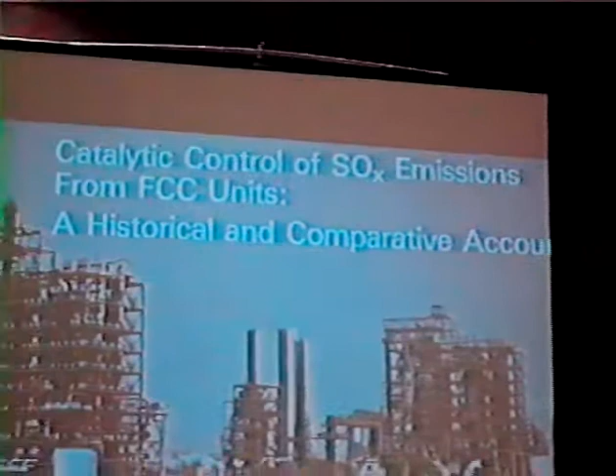This morning I'd like to discuss with you the development of catalyst systems for the control of sulfur dioxide emissions from FCC, fluid catalytic cracking units. I'd like to trace their chronological development, because I believe the chronological development of the sulfur dioxide system at Amoco pretty well parallels what's been done by other workers in the field. We'll look at the composition, variables, and activation of these SOx control catalysts, and also some catalytic systems now being pursued commercially to control SOx emissions from FCC units.

The driving force in this research is the 1987 EPA regulations, which will limit SOx emissions to less than 300 parts per million. If you're curious about the background of this particular slide, these are two of Amoco's fluid catalytic cracking units.

It's almost 10 years to the day since Vasalos and his co-workers at Amoco announced the development of the UltraCat system for handling SOx control from fluid catalytic cracking units. They did this in a paper reported at the 1977 API meeting in Chicago. Shortly after that, a number of companies announced that they too had developed catalysts for handling sulfur dioxide emissions. These are the dates of the announcements found in the trade literature. Amoco and others have been working in this area for well over 15 years.

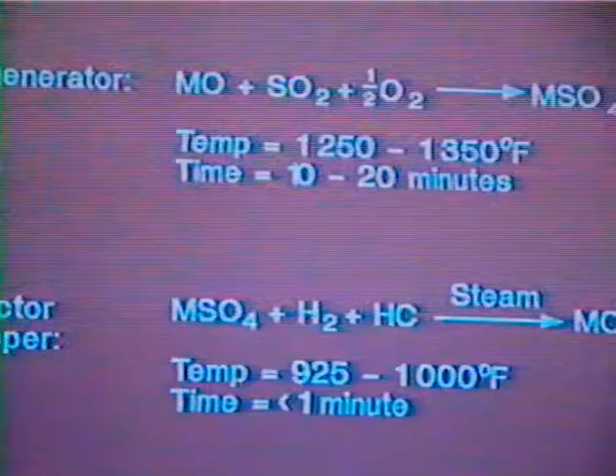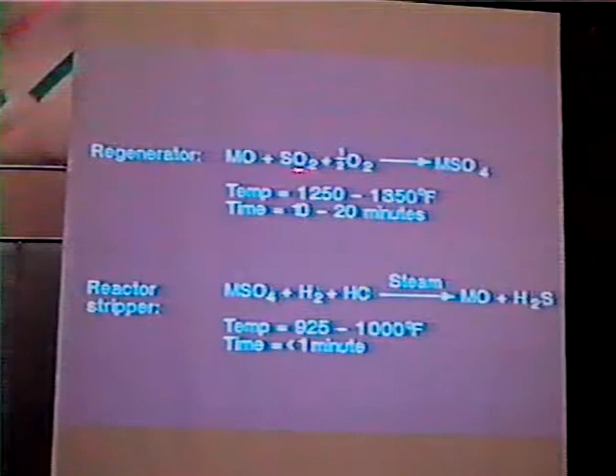This is an oversimplification of the chemistry involved in the process. In the regenerator, catalyst is added, depicted here as metal oxide, which could be cracking catalyst. It reacts with the sulfur dioxide and sulfur trioxide formed when sulfur in the coke is burned in excess oxygen to form the metal sulfate. The temperatures here vary between 1250 and 1350 degrees Fahrenheit, and the times vary between 10 and 20 minutes.

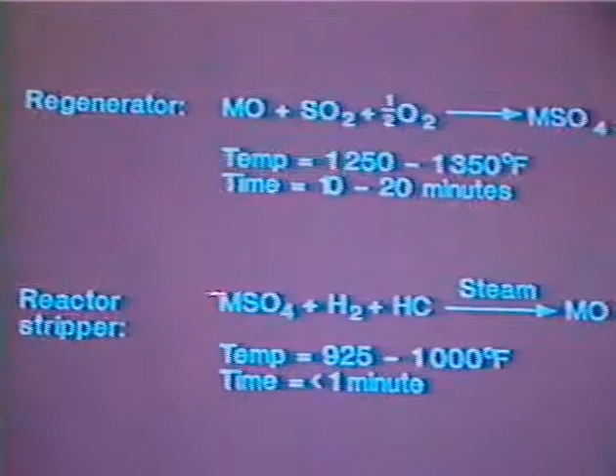The catalyst then moves from the regenerator to the reactor stripper section, where it reacts with and is reduced by hydrogen and hydrocarbon during the cracking reaction. In the presence of steam in the stripping operation, the sulfur is converted to hydrogen sulfide. The catalyst is then regenerated and ready for another cycle. During the cracking operation, temperatures vary between 925 and 1,000 degrees Fahrenheit, and the catalyst is in the reactor for less than 1 minute.

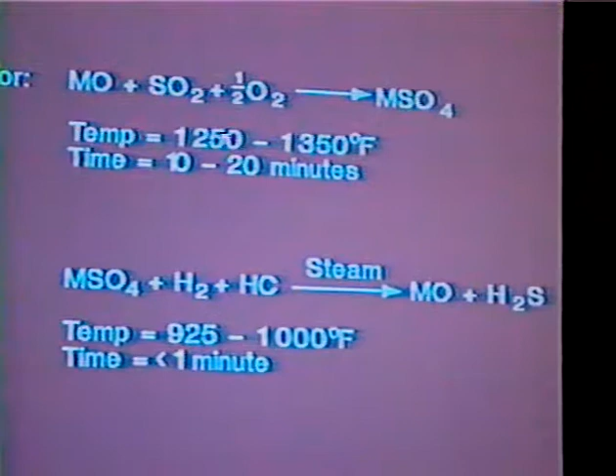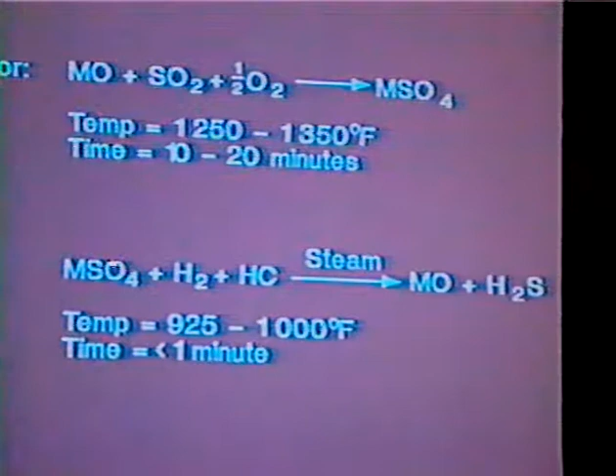I'd like to point out that under these conditions, particularly the severe conditions in the regenerator, the cracking catalyst and the SOx transfer catalyst must be rugged to withstand them. Also, any catalyst put into the system for SOx transfer control must not have an adverse reaction with any of the reactions taking place during the cracking reaction itself.

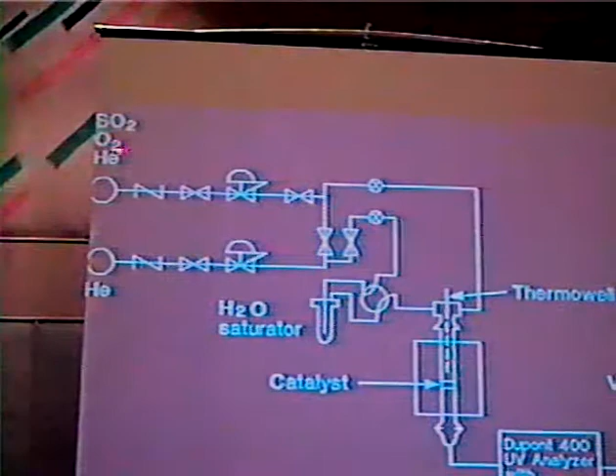This is a diagram showing our experimental equipment. We blend sulfur dioxide and oxygen, mix it with helium saturated with water at room temperature to give a composition of 1,000 parts per million sulfur dioxide, 2.7% oxygen, and about 2% water. The gas mixture is passed over the catalyst. About 1 gram of catalyst is used in the system. The reactor is quartz, provided with an axial thermowell. The gases then exit and are analyzed as they pass through a DuPont UV analyzer.

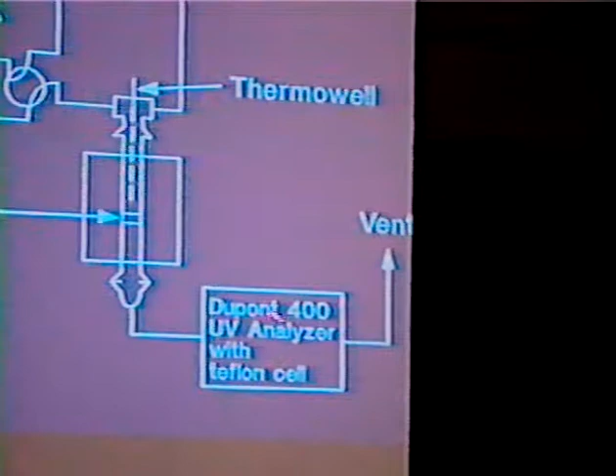We've used this apparatus for all our screening work, as well as for following the deactivation of SOx transfer catalyst during commercial trials. We'll report our data as the percent of sulfur dioxide removed, or as the amount removed over some time frame. All of our catalysts are pre-treated in steam at temperatures between 1250 and 1550 degrees Fahrenheit.

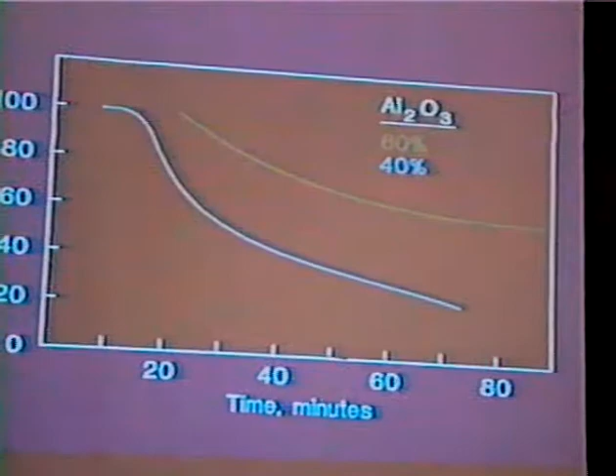Let's move on to cracking catalysts, where this all began. This is a plot of the percent of sulfur removed versus time for three different cracking catalysts of varying alumina content, varying between 30, 40, and 60%. The amount of sulfur dioxide removed depends upon the amount of alumina in the cracking catalyst. A higher alumina removes more sulfur dioxide than either the 40% or the 30%.

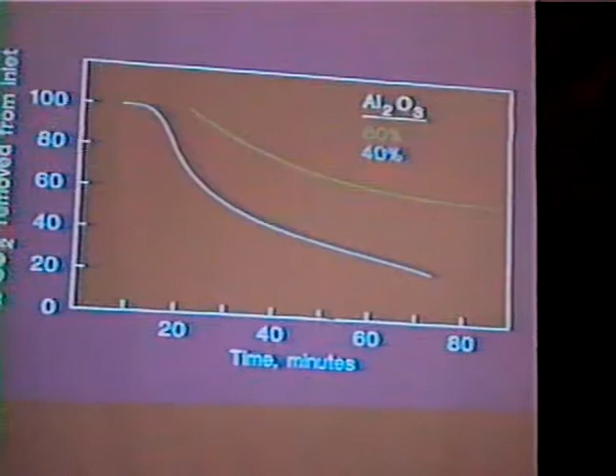This green line actually represents two catalysts: one made with rare earth exchange Y, and one that contained the Y in the hydrogen form. This was slightly misleading to us at first, because we thought, based on this data, that the rare earth had no influence on the sulfur dioxide absorption.

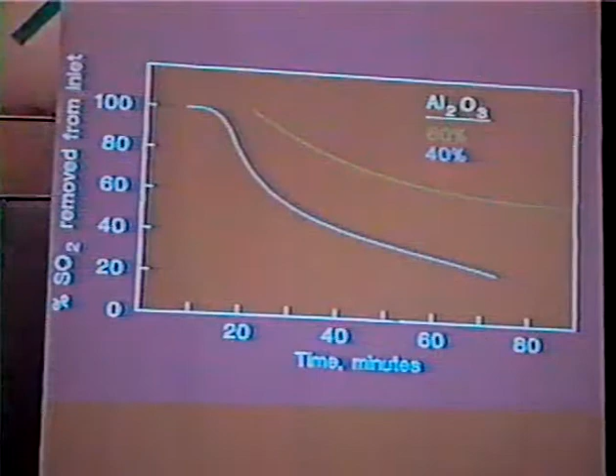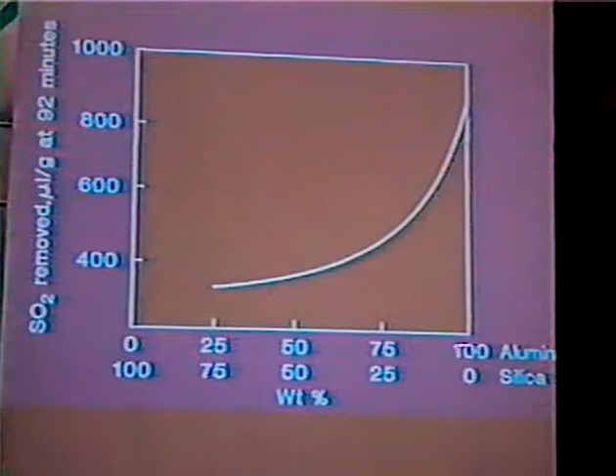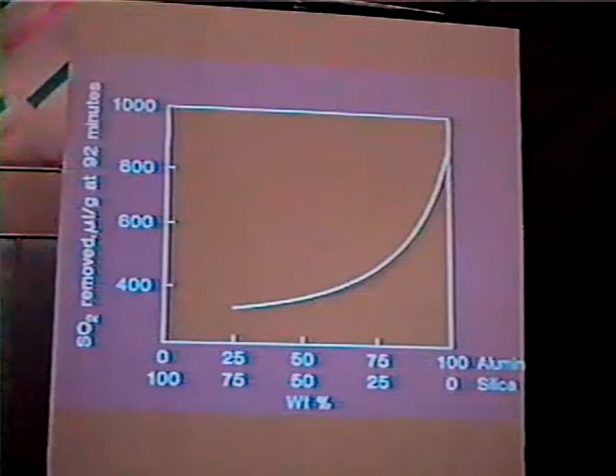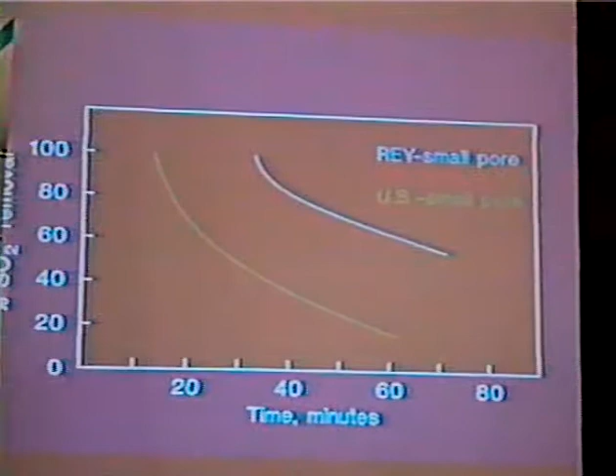So we conclude from this that alumina is a very important component in the catalyst. What about the rare earth, and what about the pore size of the alumina in the matrix? Those are 2 questions we raised next.

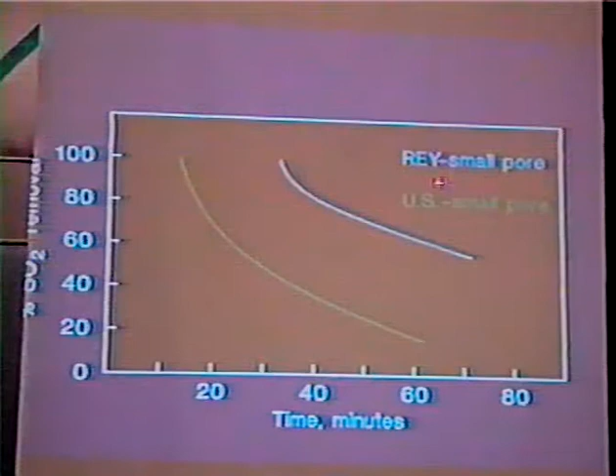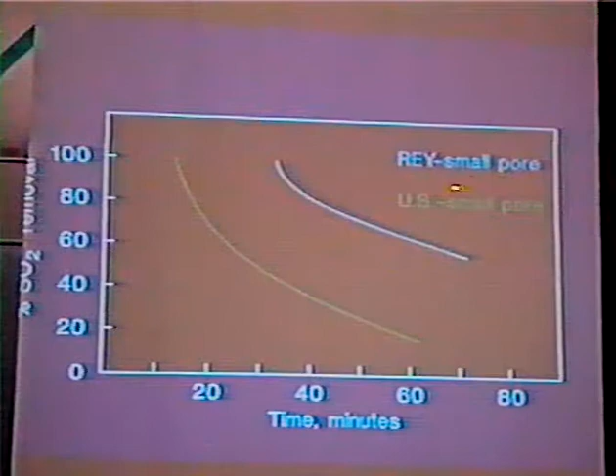We made up 3 series of catalysts containing exhaustively exchanged rare earth Y, or ultrastable Y in the hydrogen form, with 2 different types of alumina in the silica alumina matrix, small pore and large pore. We measured the sulfur dioxide removal capacity versus time, and found that small pore or large pore alumina made little or no difference in the amount of sulfur dioxide absorbed.

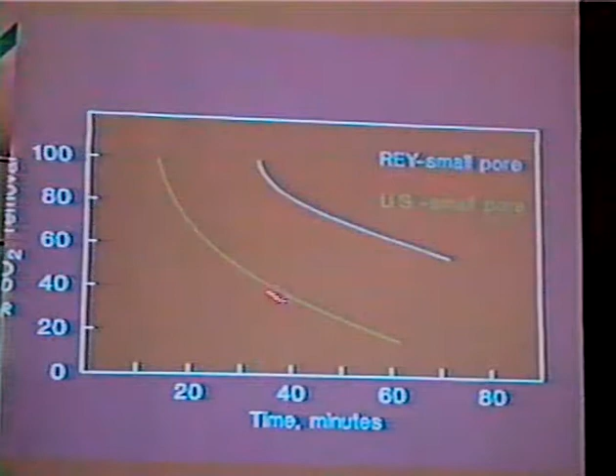But the rare earth type made a large difference. The US Y was much less active than the REY for sulfur absorption. So based on the data of the previous slide, where we showed that alumina was important, we now see that the rare earth was important.

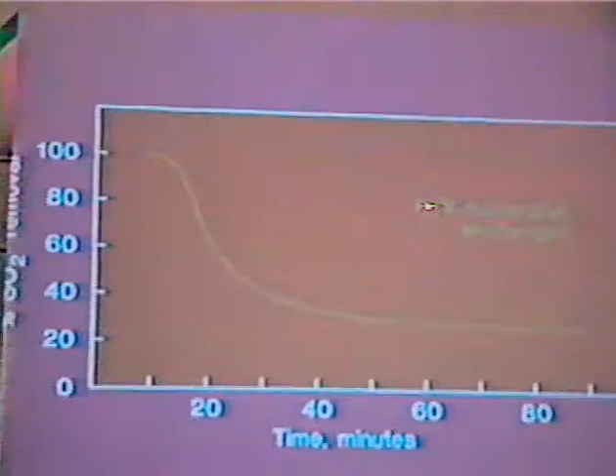And this contradicted information we had on an earlier slide, which showed that the rare earth Y and the US Y were comparable. To try to explain this, we made up 2 catalysts in which we varied the rare earth types. One catalyst was made up with a well-exchanged rare earth Y.

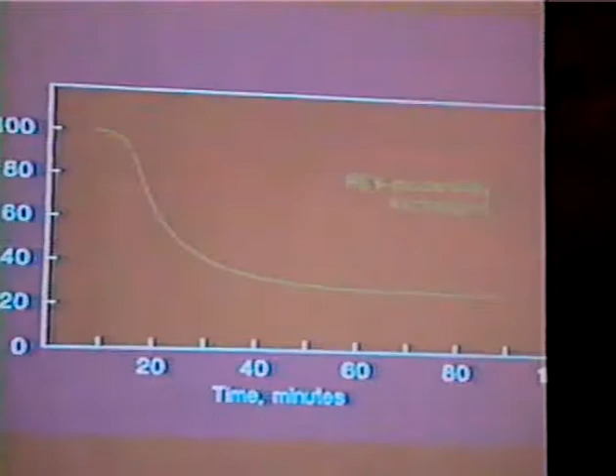That is, it contained less than 0.2% sodium. The other one was made up with a moderately exchanged rare earth Y, containing up to 2% sodium. We then measured the sulfur dioxide removal capability for each catalyst versus time. You can see that the exhaustively exchanged rare earth Y was much more effective than the moderately exchanged Y for removing sulfur dioxide.

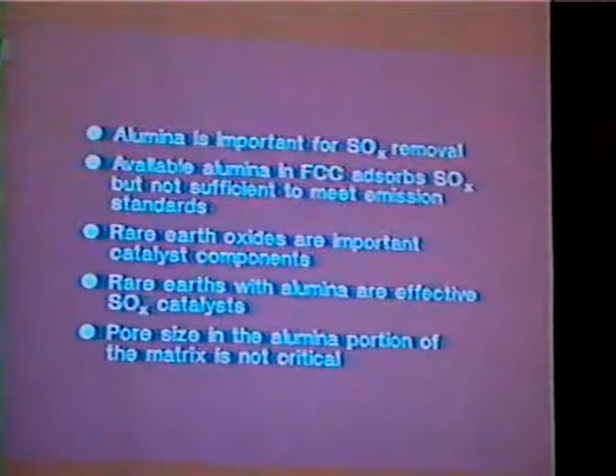So based on our work with alumina, the cracking catalyst, and with the rare earth, we can make the following conclusions on the work so far that we showed, and that other workers in the field have shown. The cracking catalyst alumina is important for sulfur dioxide removal.

Available alumina in the FCC catalyst does adsorb the SOx, but a number of cracking catalysts do not contain sufficient quantities of alumina to meet the current emission standards.

Rare earth oxides are important catalyst components. More so are... they tend to be more effective for absorbing SO2.

And based on our limited data, catalysts made with aluminas of varying pore size had little or no effect on sulfur dioxide removal. So the alumina pore size in the matrix is not critical.

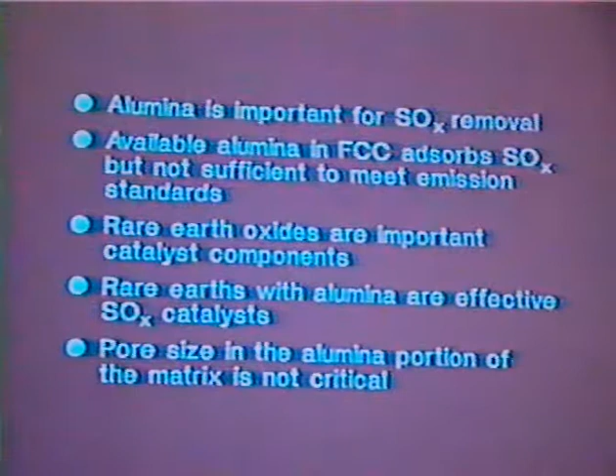Well, what happens when we add small amounts of alumina and rare earths to FCC catalyst?

Well, what about additives and promoters? Is cerium unique as a promoter?

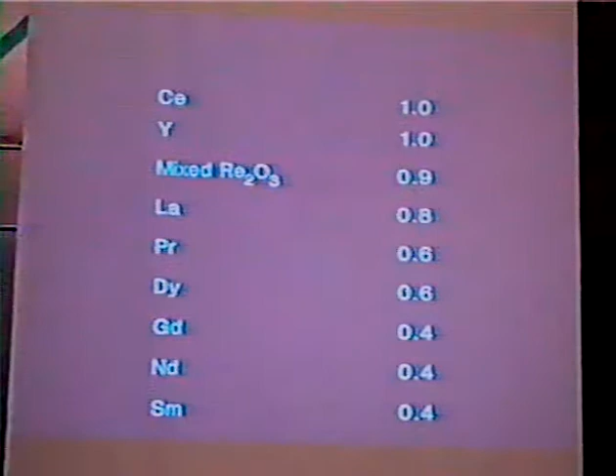Lanthanum was slightly less active than cerium, and the rest of the rare earths were much less effective for removing sulfur dioxide. Well, what about other promoters?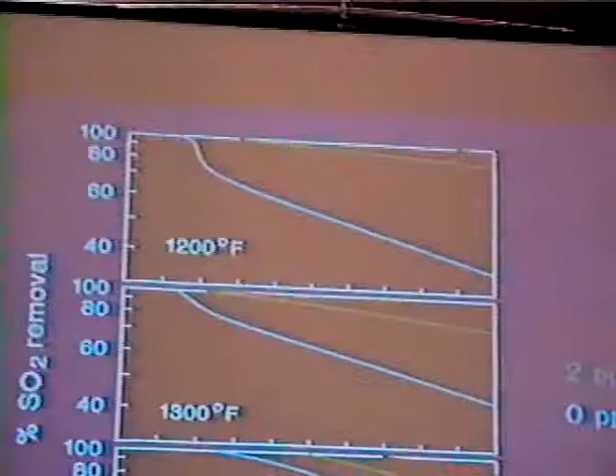We measured the SOx removal capacity versus time, and found that at 1200 degrees, both of the platinum samples were very efficient for removing sulfur dioxide. Alumina was much less active.

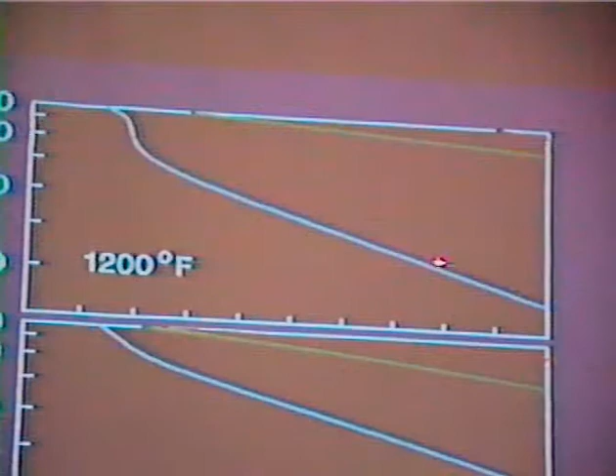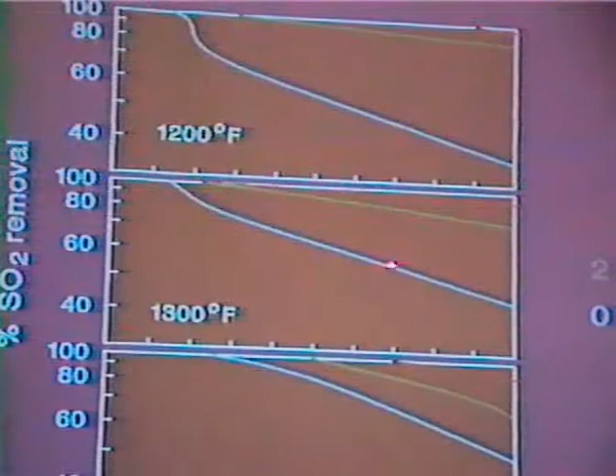At 1300 degrees, there's a slight deactivation for both of the platinum-containing samples, when alumina begins to look more active for sulfur dioxide removal.

At 1400 degrees Fahrenheit, both of the platinum samples show some deactivation, and alumina begins to improve its activity for removing sulfur dioxide. In fact, had we run these experiments up to 1500 degrees Fahrenheit, we would have found that all of these catalysts were equivalent for removing sulfur dioxide.

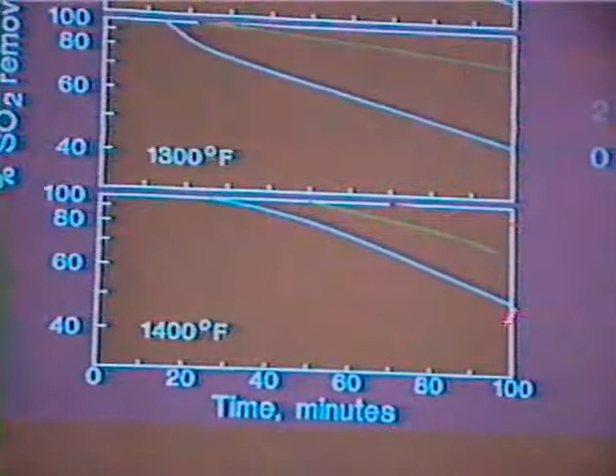Well, platinum is effective for promoting alumina as a sulfur dioxide transfer catalyst. However, platinum has problems.

Platinum has problems. Platinum can promote the formation of NOx, and nothing excites a refinery manager more than to see an orange plume rising above his catalytic cracking unit. Further, although expense at low concentrations isn't important for a platinum-containing catalyst, if more catalyst has to be used to control SOx emissions to a given level, then catalyst cost is one of the considerations that has to be taken into account.

Therefore, we focused all of our attention on cerium as a promoter.

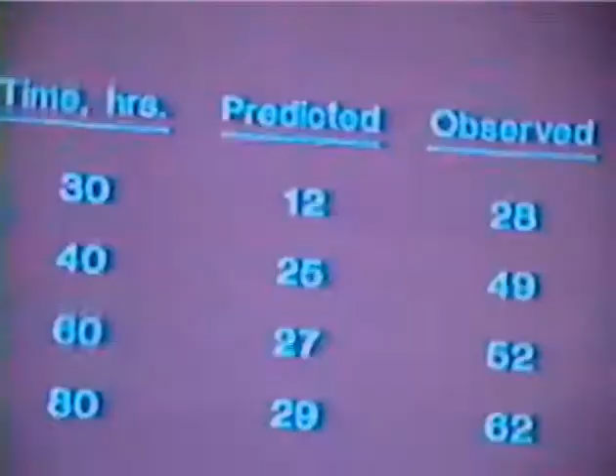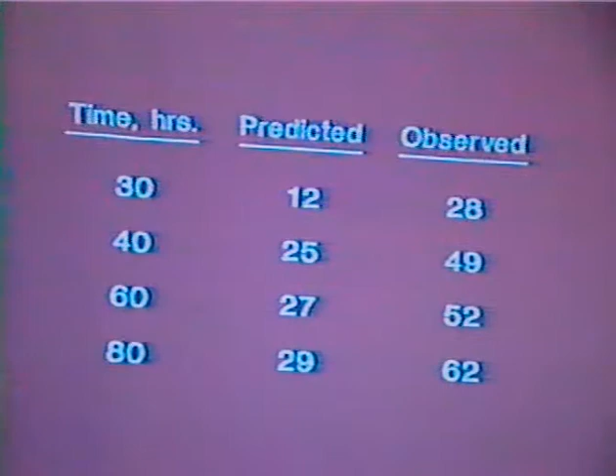What about catalyst deactivation? To test this, we made a large pilot plant run using 10% cerium on alumina as a catalyst mixed with the fluid cracking catalyst. The catalyst was deactivating, and we thought this may have been caused by attrition and loss in surface area. We had developed a simplified model relating surface area attrition loss and sulfate accumulation to SO2 removal activity. When we applied the model to our data, the predicted values were in strong disagreement with the observed values. We therefore concluded that we had to look somewhere else for the answer to catalyst deactivation, rather than attrition and surface area loss.

We took samples at 30, 60, and 80 hours and examined them by scanning electron microscopy. These are the SEM EDAX analyses of the samples from the 30 and 60 hour runs. You can see the outline of the cerium on alumina catalyst here; the spots are silicon.

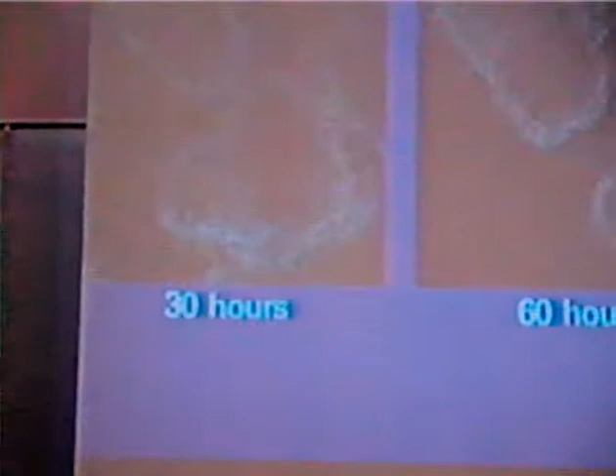The silicon has moved well into the interior of the cerium alumina SOx transfer catalyst, even more so at 60 hours, and to an even greater extent at 80 hours. Silicon then is one of the factors that's probably causing the deactivation of the catalyst — perhaps not the only one, but one of the major factors.

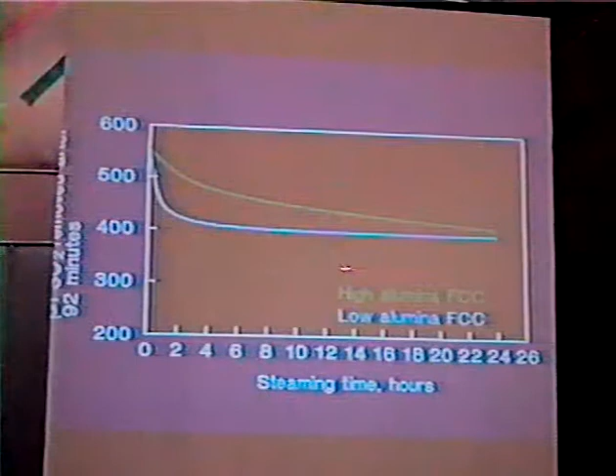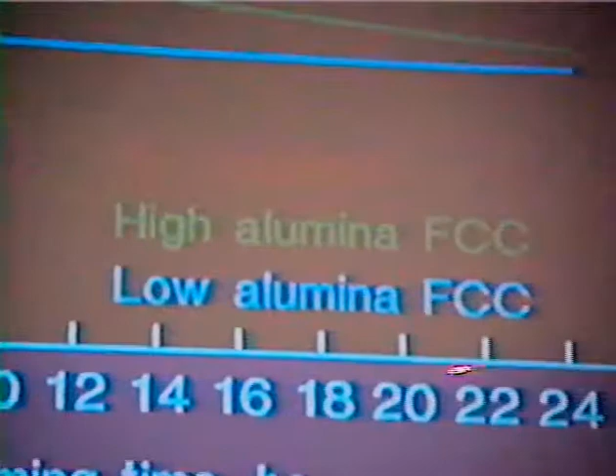To further show this, we treated the catalyst and looked at the sulfur dioxide removal capacity versus steaming time for a catalyst that was just calcined at 1,000 degrees and then steamed, versus two catalysts that were interactively steamed: one with no cracking catalyst, and two in which we had a high alumina cracking catalyst and a low alumina cracking catalyst mixed in with the cerium on alumina SOx additive catalyst.

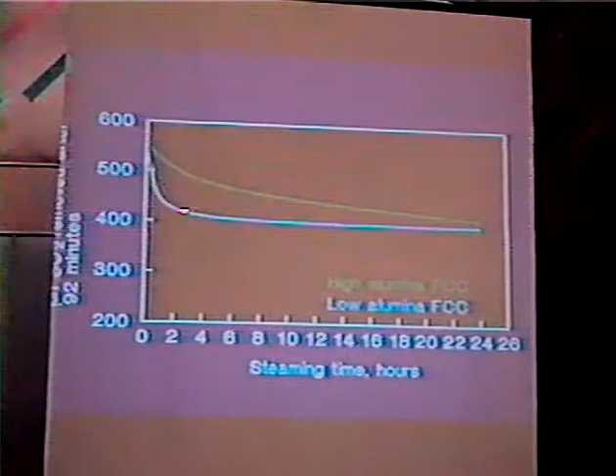We then separated the catalyst and measured the sulfur dioxide capacity, finding that while the catalyst steamed in the absence of cracking catalyst deactivated, the catalyst steamed in the presence of high and low alumina cracking catalyst deactivated to a much greater extent. In fact, the catalyst steamed with low alumina deactivated even more than the one steamed with high alumina.

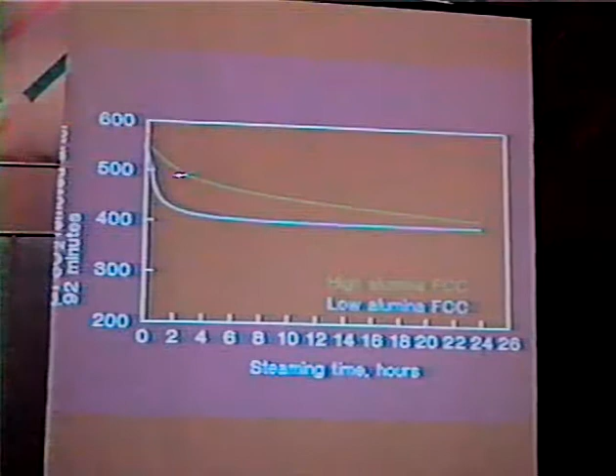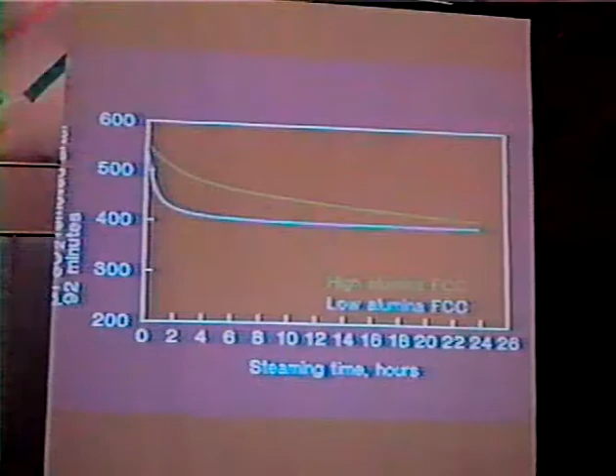We then took three samples at the end of 2 hours — the catalyst steamed by itself, and each of the catalysts steamed with high and low alumina — as well as samples at 24 hours, and examined these by SEM EDAX. The catalyst steamed by itself shows a very small amount of silicon on its exterior, picked up because we did the steaming in the Vycor reactor.

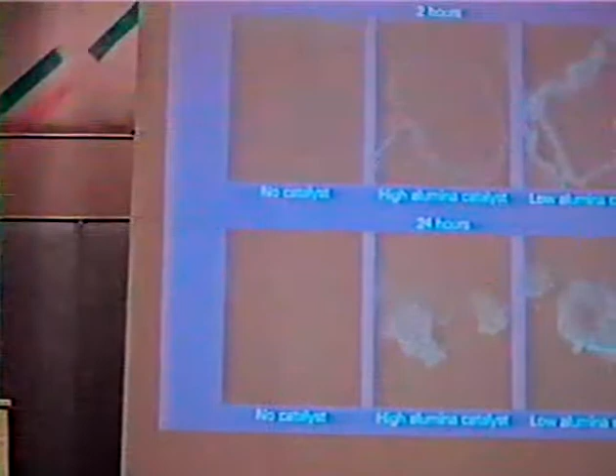However, the samples steamed interactively with a fluid cracking catalyst showed a high concentration of silica at the interior of the SOx transfer catalyst. This is the sample steamed in the presence of high alumina for 2 hours, and this is the sample steamed in the presence of low alumina for 2 hours. You can see a marked difference in the concentration of silicon that has reached the interior of the SOx transfer catalyst. Likewise, at 24 hours, some silicon was picked up from the Vycor steaming reactor for the catalyst steamed by itself, whereas the two catalysts steamed for 24 hours interactively with low and high alumina show substantial amounts of silicon distributed throughout the SOx transfer catalyst.

About the time we did this work, Vern and his co-workers at Engelhard reported their work on the deactivation of SOx transfer catalyst by silica, and our results here agree very well with theirs.

To further show the effect of steam and the necessity of having steam, and the effect of high temperatures, we took a series of catalysts that we did not treat with steam. This catalyst was simply calcined. Two samples had the temperature increased from 1400 to 1550 degrees during the steaming operation, and we measured their sulfur dioxide removal versus the percent silica which we added to each catalyst in the form of silicic acid.

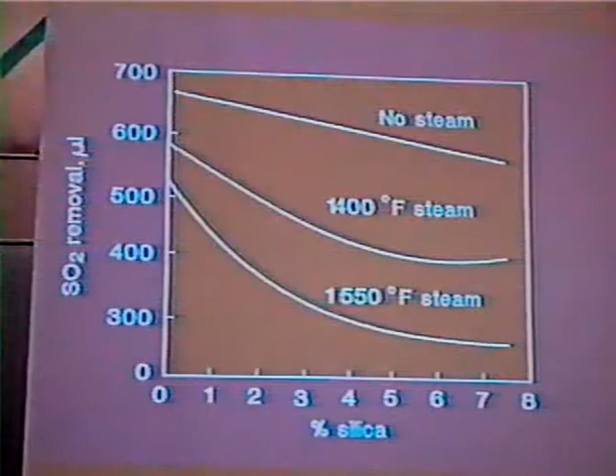These data show that three effects are necessary for the deactivation. First, you have to have a source of silica, and secondly, temperature is required, as well as presence of steam. It's fairly well known that silicon is mobile in steam, especially at temperatures beyond 1250 degrees Fahrenheit.

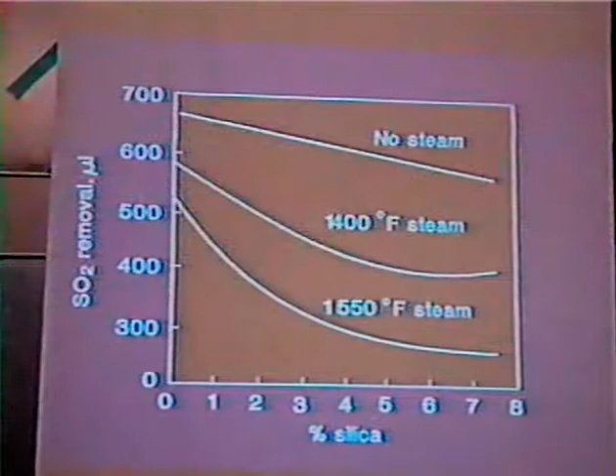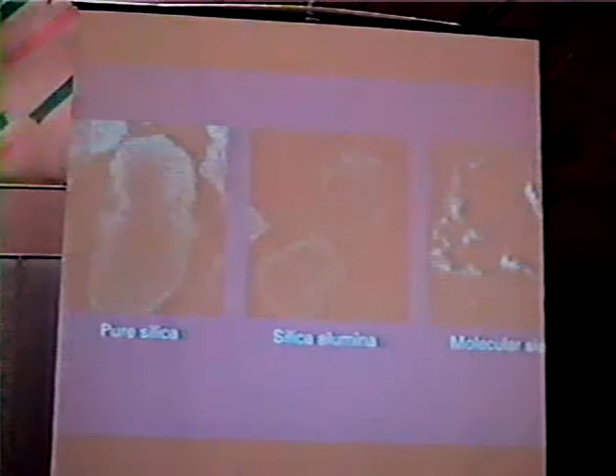The source of the silica is another question that came up. We believe there are three sources that could lead to silica deactivation: pure silica which might be present in the cracking catalyst, silica that could be present from the silica alumina in the matrix, and finally the silica that's present in the aluminum silicate molecular sieve used in the cracking catalyst.

To show this effect, we took samples of pure silica gel, silica alumina, and aluminosilicate molecular sieve, steamed these with our alumina ceria additive, separated them, and again examined them by scanning electron microscopy and EDAX.

Again, we found that with the sample steamed in the presence of pure silica, there was a substantial migration of silicon across and well distributed throughout the cerium on alumina SOx transfer catalyst.

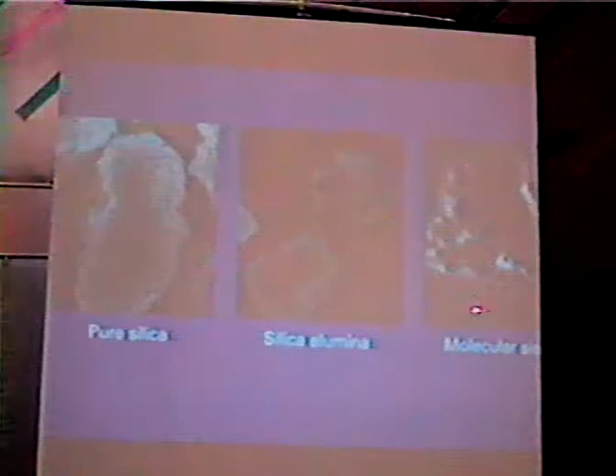The same was true with the silica alumina, silica available from the silica alumina matrix, although the concentration was much less. With the molecular sieve, because it is more finely divided, the silicon accumulated as a dust outlining the particle rather than distributing itself across the cross-section of the SOx additive.

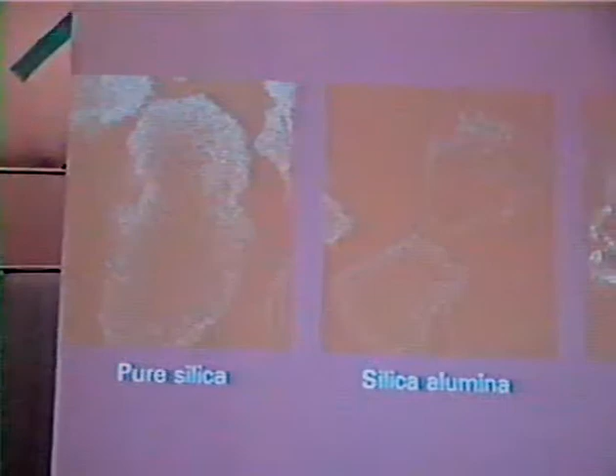And so we conclude that silica is coming from the silica alumina matrix in the cracking catalyst.

This and other suggestions have been made in the patent literature. For example, some people have suggested using sodium, manganese, or phosphorus as materials to slow down the deactivation by silica. Unfortunately, these materials limit the kinds of catalysts that can be used in the FCC part of the cracking operation, and in fact may be deleterious to the cracking reaction themselves.

One other solution to the deactivation problem is to develop a higher capacity SOx transfer catalyst. Magnesia has been shown to be active, and more active than alumina, for SOx capture. In fact, in 1949, Hertwig and Healy at Amoco showed that silica alumina magnesia catalyst was much more efficient for removing sulfur than silica alumina. Unfortunately, silica mag catalyst did not regenerate very well and was not a viable catalyst for the cracking operation.

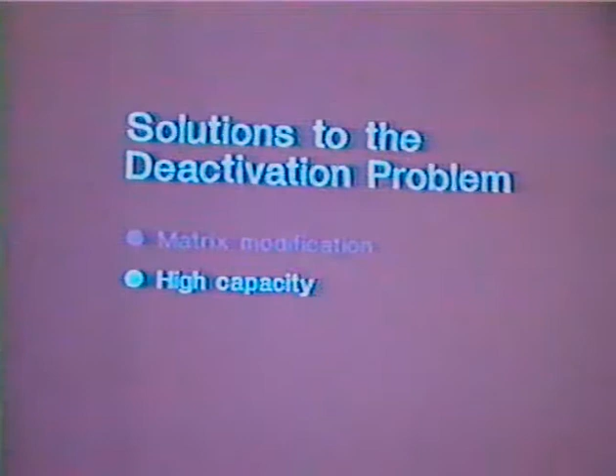Another way of solving the problem was to increase the capacity of the catalyst. The idea here being that as you increase the capacity, the amount of catalyst used would be less, even though the catalyst may be deactivating at the same rate.

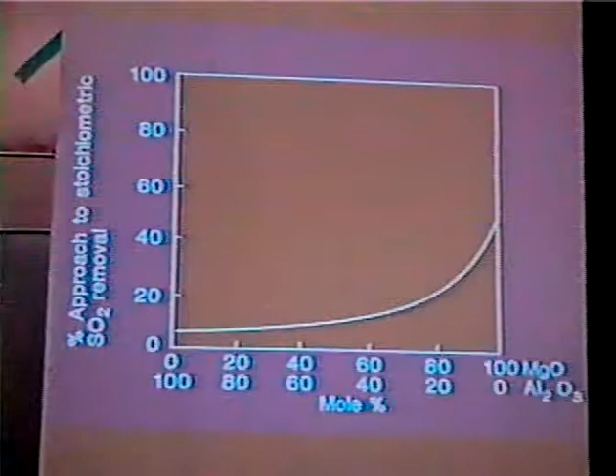Let's now look at the effect of magnesia. This is a plot of the SOx removal capacity, based on the percent approach to stoichiometric removal of sulfur dioxide, for a series of catalysts in which we varied the alumina and magnesia concentration. All of these catalysts contain 6% ceria, and all were steamed for 5 hours at 1400 degrees before we determined the SOx removal capacity.

Approach to stoichiometry means that at 100% approach to stoichiometry, all of the magnesia, all of the alumina, and ceria would have been converted to their sulfates.

You can see that magnesia is much more efficient than alumina for SOx transfer. At 100% alumina, we're seeing about 6% approach to stoichiometry. As we add increasingly more magnesia, once we reach about the 50% stoichiometric amount, we begin to see a dramatic increase in the SOx removal capacity. This increases until we get to 100% magnesia, where we have well over 40% approach to stoichiometry.

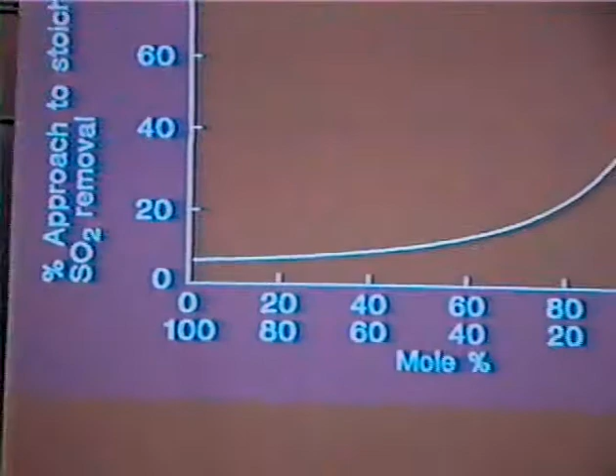We wanted to determine what the active ingredient of this system was, so we took a series of catalysts that contained 50 mole percent magnesia and alumina and 6% cerium, and looked at it further to see if we could tell what the active component was.

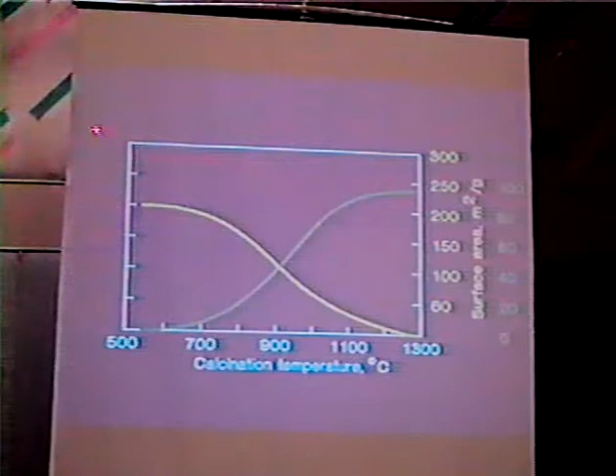Here we plotted the percent sulfur dioxide removed versus calcination temperature. We followed the sulfur dioxide removal, shown here in red, and looked at the surface area of the catalyst, shown here in yellow. While treating these samples, we analyzed each one as we varied the temperature between 500 and 1300 degrees Celsius to try to determine what the active component was.

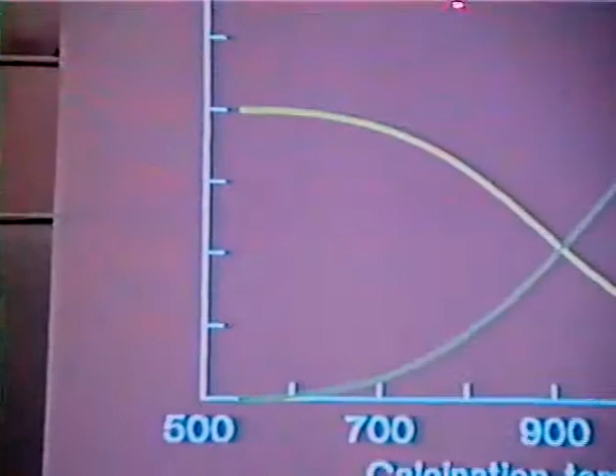At temperatures up to about 750 to 800 degrees, the sulfur removal is very high and the surface area is high. In this area of high activity, the only constituent we could find by X-ray diffraction was high concentrations of gamma alumina.

At temperatures beyond 700 degrees, we begin to grow in the magnesium aluminate spinel. This continued on up with temperature until at 1300 degrees we were at 100% spinel formation. But we don't think the spinel is the active component, because as the spinel concentration increases, the sulfur dioxide removal capacity decreases along with the surface area.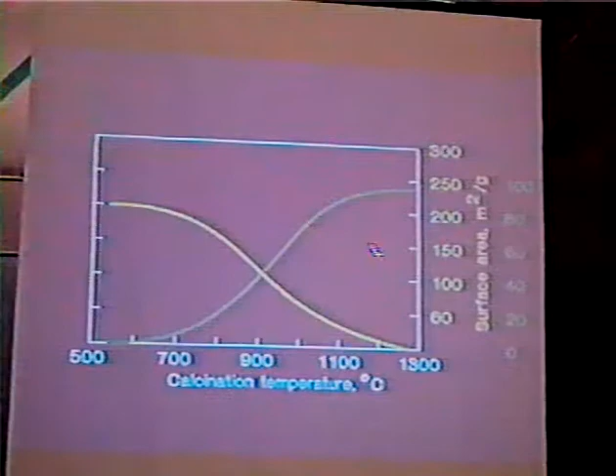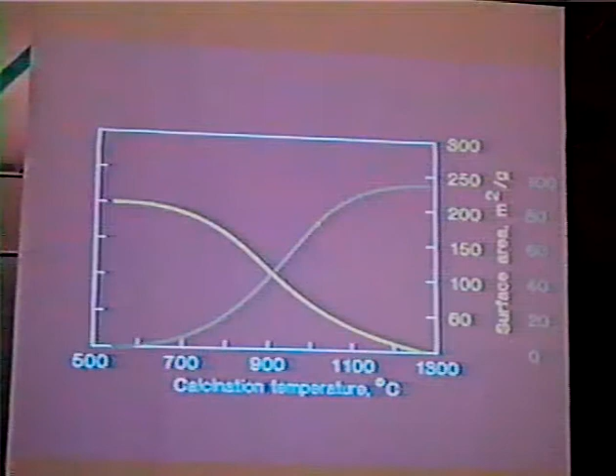In this area, the only component we could measure was the magnesium spinel. There was no other active component. Although we feel that in this area the active material is probably highly dispersed magnesium oxide, more work has to be done before we know that definitely.

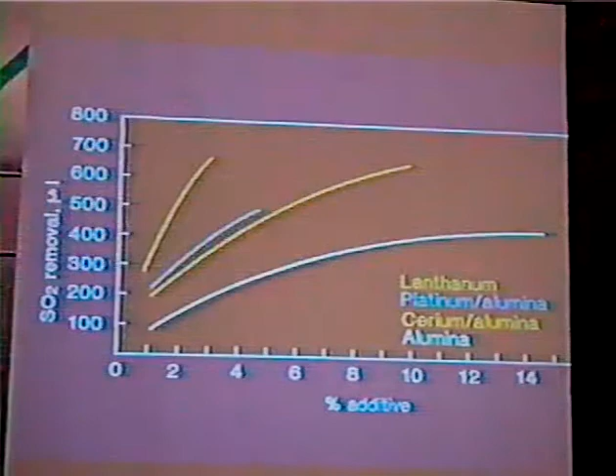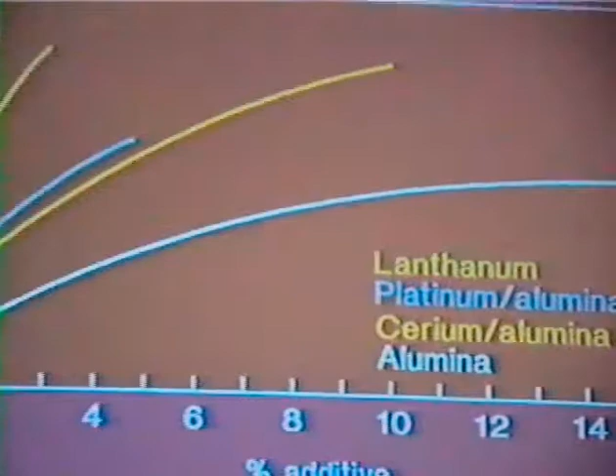Well, let's now look at a series of commercially available catalysts. These catalyst systems are all based on either magnesium or alumina as the base, or combinations of magnesium and alumina, promoted with rare earths or platinum. This shows the sulfur removal capacity versus quantity of additive needed to remove high concentrations of sulfur dioxide.

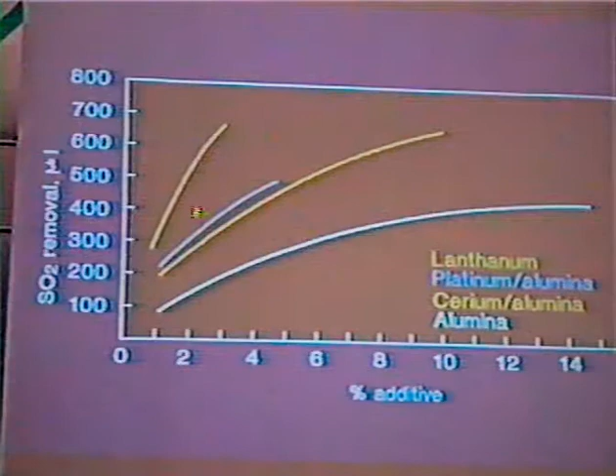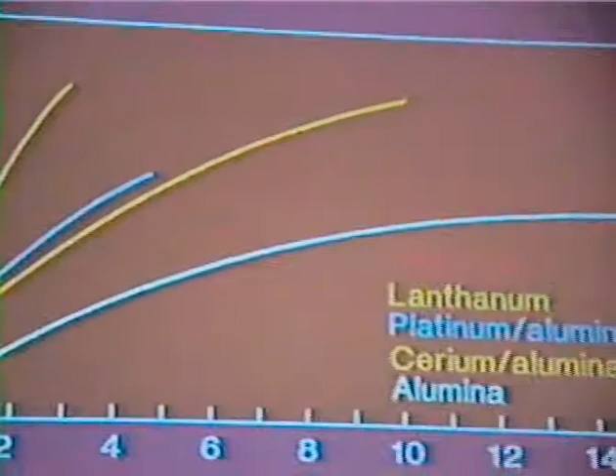These catalysts were all tested fresh, no steaming, and you can see that those based on the magnesium system are very active, followed by the systems based on platinum. Platinum and cerium on alumina are about equivalent in their activity, and alumina itself is only marginally active, and you need a lot more alumina in order to reach the same activity level as the rest of these catalysts.

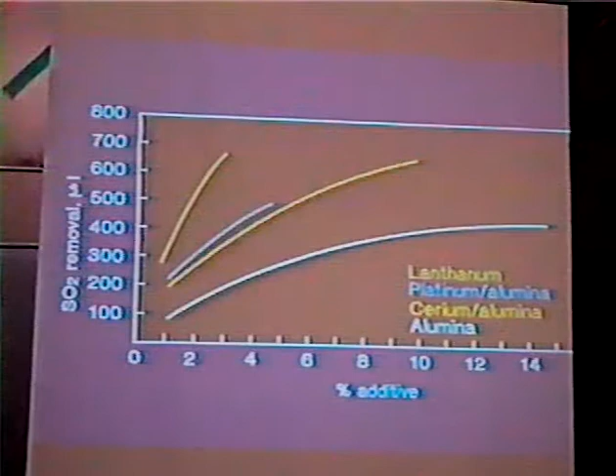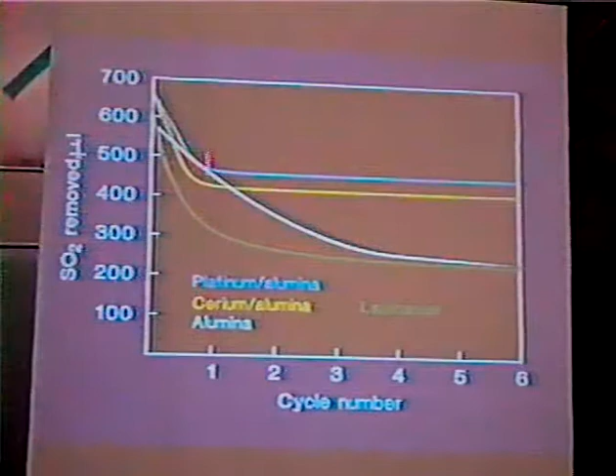Well, fresh catalyst activity is one property of the catalyst that's important. Regenerability is another property. In order to get a feel for the regenerability of these catalysts, we tested all these by adjusting their activities to the same point, determining how much material we needed to maintain the same initial activity. We looked at this by looking at the sulfur dioxide removal.

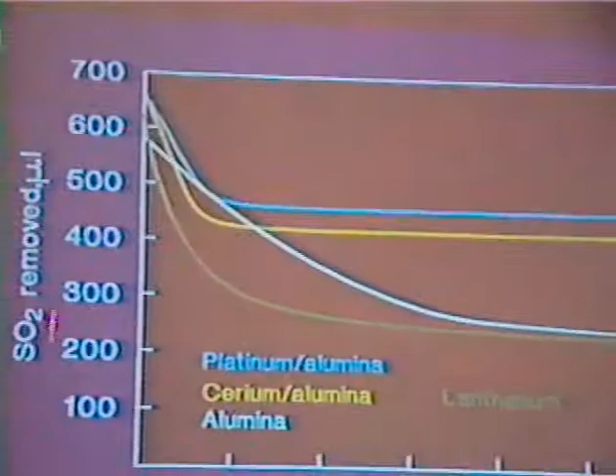After we had treated each one of the catalysts, first with sulfur dioxide and then with hydrogen to regenerate the catalyst at temperatures up to 930 degrees, we repeated these cycles six times for each one of these catalysts, sulfur dioxide followed by hydrogen. This gives us some indication as to the regenerability of this catalyst system.

You can see from the data that the platinum on alumina retained and recovered about 60% of its initial activity after completing six cycles. Likewise, the cerium on alumina was very active and was regenerating to about 60% of its original activity.

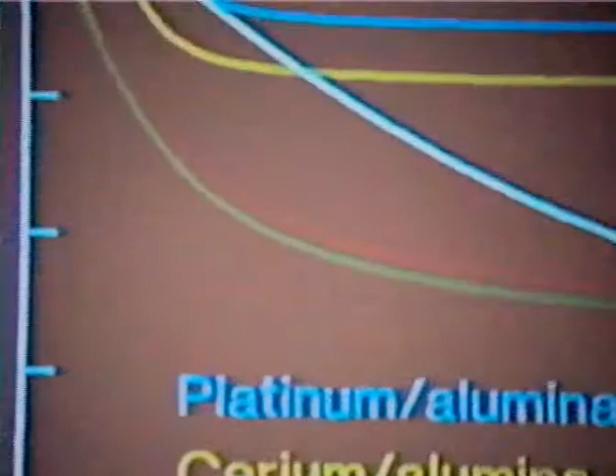Whereas alumina, magnesium, and lanthanum-containing catalysts were all regenerated to a much lower level. Six cycles is not very long in the lifetime of the cracking catalyst, but this gave us some idea on the regenerability of the catalyst.

Well, fresh catalyst activity and regeneration are important, but we saw that deactivation was also a very important consideration for these catalysts. Part of these same series of catalysts deactivate in the presence of interactive steaming with the cracking catalyst.

The next slide shows us the data of the following sets of catalysts: alumina, lanthanum, cerium alumina, platinum alumina, magnesia. Again, we adjusted the initial activity for all these catalysts by taking different catalyst weights. We treated each one of these catalysts by steaming interactively with a low alumina cracking catalyst for 5 hours at 1400 degrees, and then we measured the SOx removal capacity.

Now this is a very severe test, because the alumina is much less active than the magnesium, so we're using a lot more alumina than we have magnesium. Nonetheless, we can see from the deactivation study that alumina loses very little of its activity, whereas magnesia is very much affected by silica deactivation.

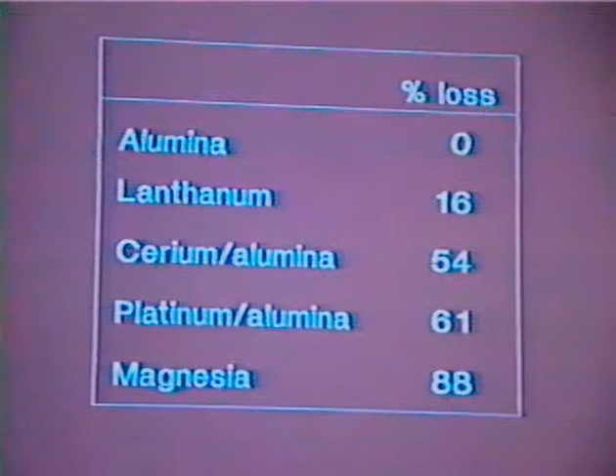Now, which one of these catalysts will be used by the petroleum refiner will depend on a number of factors. First of all, it will depend on the type of cracking catalyst he has in his cracking zone. It will depend upon the temperature of the cracking zone, the temperature of the regenerator, and the type of reactor and sulfur that he has coming into the system.

Well, this morning we have covered a number of compositional studies. We looked at catalyst promoters and deactivation. So what kind of conclusions can we come to, and what kind of conclusions have other workers come to in determining the ability of these materials to control the SOx emissions?

First of all, we can conclude that SOx emissions can be controlled by transfer catalysts. We think we pretty well understand catalyst deactivation, at least deactivation by silica, although we don't quite understand the deactivation mechanisms in some of these more active systems.

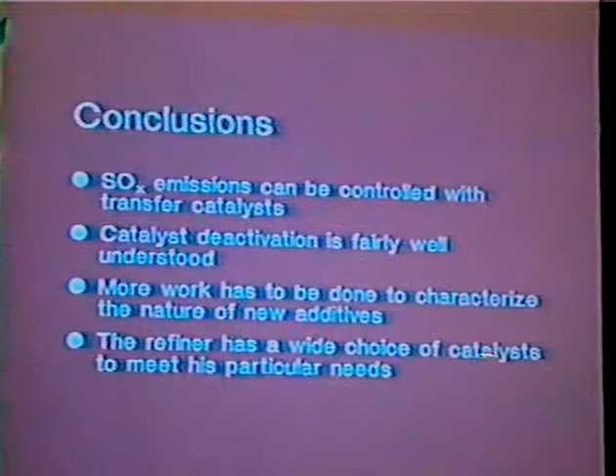More work needs to be done to characterize the nature of the new additives, particularly those based on magnesium. And finally, the refiner has a wide choice of catalysts to use to meet his particular needs.